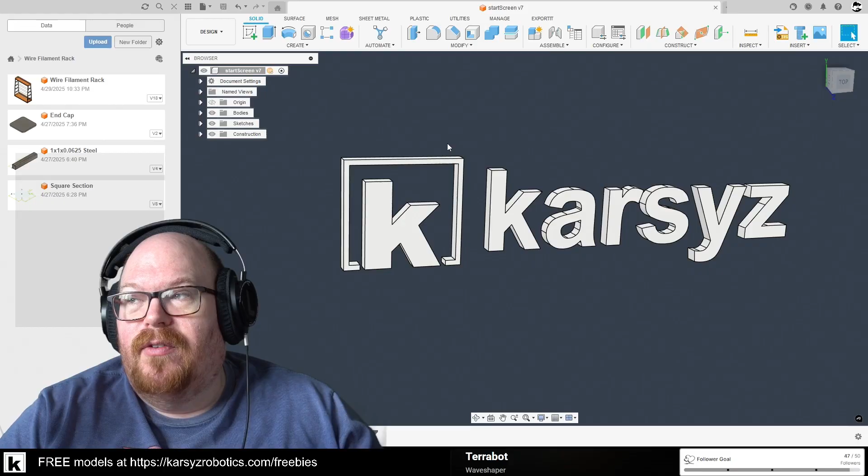I haven't really thought about that because I did a lot of contributions in, excuse me, starting to leak. I must be getting sick or something because this has been happening pretty frequently. It's just like the one eye too.

Anyways, the Fusion 360 Discord - before, when I used Facebook, I was on the Facebook group. Howard Swami, if you're out there, thank you for everything that you've done. I remember trying to compete with you on how many things you were helping out with for the community. It was so good at the time, and I was learning a lot from you.

Hopefully you learned a little bit from me too, maybe not, I don't know. But it's like trying to get to that level, that was the aspiration. I don't really have - I could give my time in other areas, but I feel like I'm pretty good at doing this. I'm not great, maybe I am pretty good at this. I've always been super humble, but I'll just say, okay, I'm pretty decent at doing this, plain and simple. So I'm willing to try and fail and learn. That's one of the things I want to keep doing.

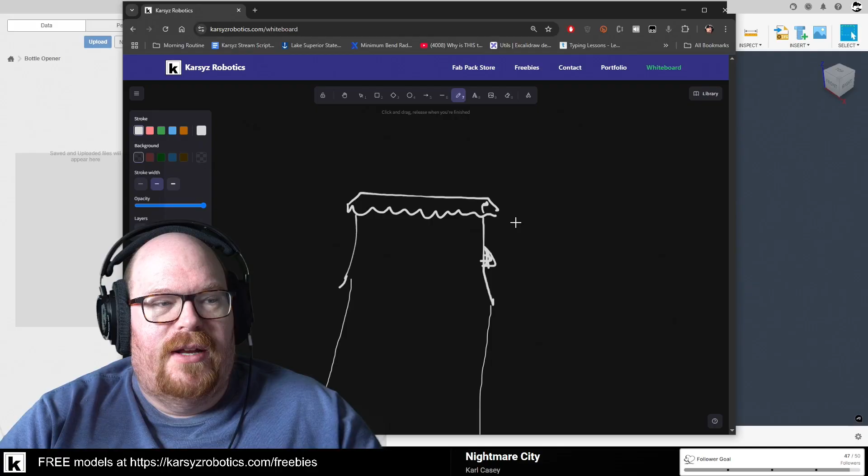So bottle openers, hopefully we've all used one at some point. The whole idea is that if you pry against something, like a reaction force, we want to get this thing to go like that, and we're prying up on this. So this force has to be coming down here. Two forces like that, it's literally that simple.

Usually when you have a shape, you could say I've got like a hook thing here, and it's got a handle on it. Pretty basic, right? So now we want to make this thing stationary, and a lot of the ways we do that is just by having a piece.

It's got a hole in it. I'm going to draw it in front view first. Maybe a couple holes here, and then you stick the bottle up underneath this part here. So it would be something like that underneath. Then you see it here, and underneath, and then you literally just pry down on the bottle, and it takes the lid off.

So some of the things that happen after this comes off and you move the bottle away, the cap falls straight down, and then maybe you can hold the cap into something. People have made a Plinko game with it, like if this gets to 10 or something, they've made electronic versions in a whole bunch of different ways, like little arms that get counted. There's just a whole bunch of different stuff.

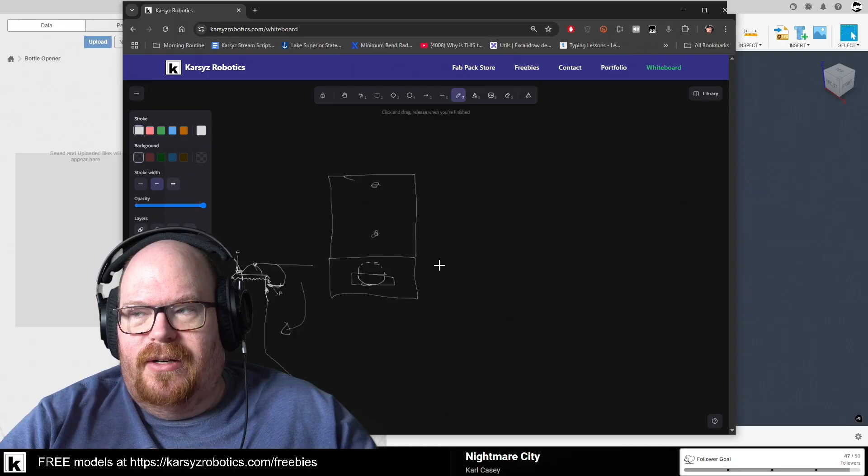Yeah, or something else, right? So there's no real rocket science in this sort of product, at least not the way I'm designing it. You can open up a bottle with a lighter or your teeth or something. It's not necessary, but it's just something fun.

So if we look at it from the right side here, in third angle projection, so if this was sitting on the thing, we just go and look at it to the right. This is kind of the idea, right? It sits on the lip and then it goes up, or it could be even the other way. If you have the bottle tipping into here, so we're just going to draw the bottle, right, so we understand what we're doing.

This is the most horrible bottle ever, we should probably do it with a little bit more care. I love these sketches, so funny. We need to hold this side here, so it's got to be up, and then there's got to be some sort of little hook or whatever. So the idea was this is like something like that, or oh, I thought it was going to be like this, but you know, my brain.

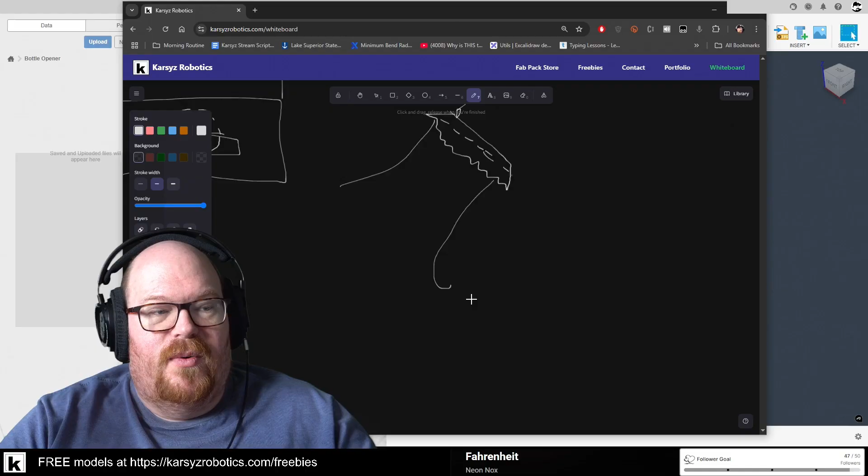So remember, we need to have the reaction force coming down this way, and this has to have a hook or something, or it just has to bind on here. So if this was straight in and out, it just has somewhere where you can put the bottle in, because you don't want to spill anything when you do that. So the liquids are usually pretty close to the top, so then this liquid would be horizontal or something like that, depending on how you're holding it.

And then it's like one fluid motion, so when you twist it, this comes down this way, maybe this is the side that's being held, right, and then the other side has to have the force acted in on it, or maybe even just a prying motion. I'm doing all this to illustrate design principles or something.

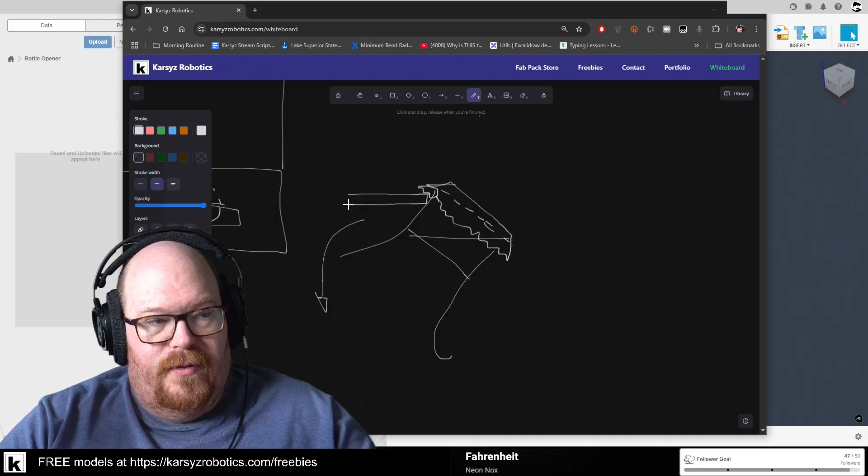Not as good, I really don't want to do that here. There we go. Better, it's more like this though. I keep doing the same shape over and over again. Pretty funny, here I'll get some training. So when we start here and go around... no, that's not the right tool.

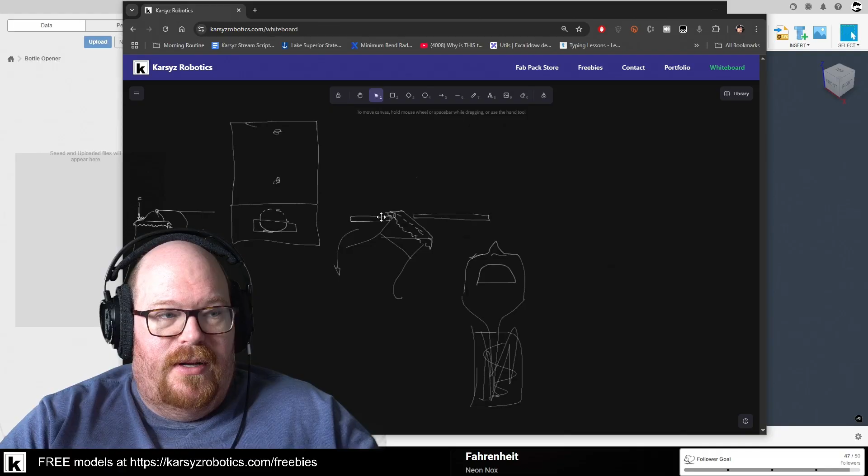So, yeah, having it like this, or you could have it just like... you sit it in such a way that it's just like a pry stop, right? Up and down, this is probably a little bit nicer, but you want to have some sort of area that you can, maybe on an angle, something like this.

Right. You could stick it in sideways, or having something that's flat is probably just as good, but if it was sticking straight up and down, think of what that angle looks like. It's probably not as exaggerated as that, depending on how big this opening is, and we could play around with that.

If you wanted to put that at an angle, where's my pencil? Right, and then this was like stuck in something else, or even just screwed into the wall like that. Right, and you have your spot - you just go up with a bottle and put it underneath this, and then you have something to pry against. And then there's twist-off ones, obviously, that are available as well.

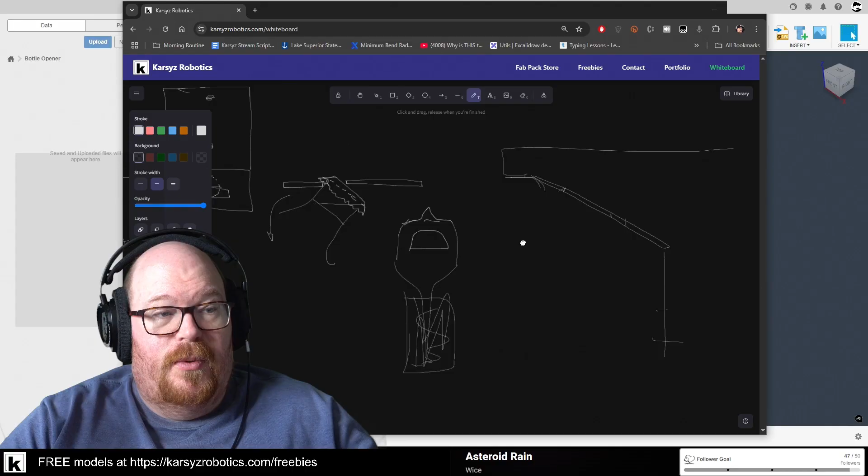Those are really neat too, by the way. So yeah, it's like this, but I just drew it upside down for whatever reason. I guess you could do it that way. If I wanted to do it this way, it would have to be...

It's so funny, right, that we can really talk about a bottle opener with such... okay, so like that, maybe not that big. I'm gonna move this up here too. So if this was the idea, right?

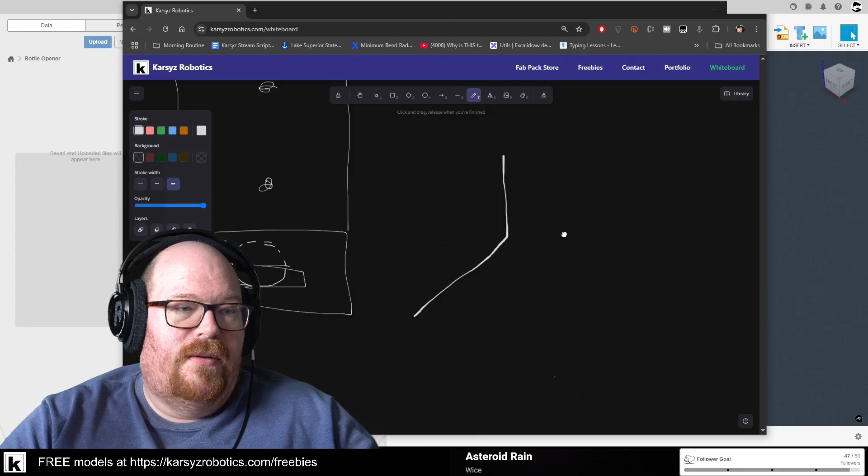A piece of whatever that is, there has to be - this is what you would pry against. So the difference between, you have to have a large enough space in here to get the bottle pry system to be, you know, from here to here, like that idea. So the bottle has to be like that. Well, there has to be room too.

And then now you have a binding condition. So as long as you can get the thing in there, this is probably great. So let's try something like that. Actually, we need to do a little bit of research - how big? What is the size, standard?

What is the size of a standard bottle cap? Bottle cap: 26 to 28 millimeters, 1 inch, height of about 5 to 6 millimeters. Most common size, 26 millimeter crown, widely used for glass bottles. So 26 millimeters. Plastic screws for PET often 26, 28 being the standard.

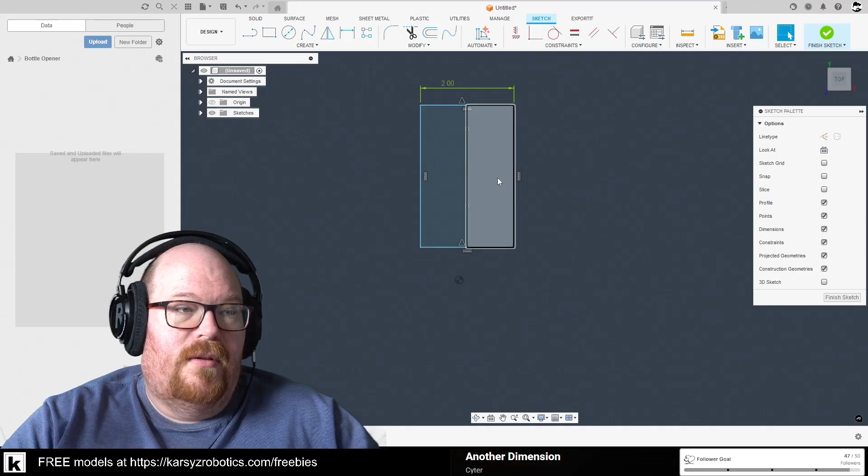Oh, 0.75, something like that. Trying to think of how thick that was. It's probably a 1/16. I've been using 0.75 for a while, so maybe I'll just keep using that.

Stainless is extremely strong, way stronger. Like the edge of a lighter is fine, so this is even better. So if it's a couple inches wide, it'll give us some strength on the one side, and be fairly robust.

Right, so we have the one, we're gonna convert this to sheet metal. Stainless steel, look at that. You're gonna make the physical material. Metal, or stainless steel, we'll make it like 304. Why not?

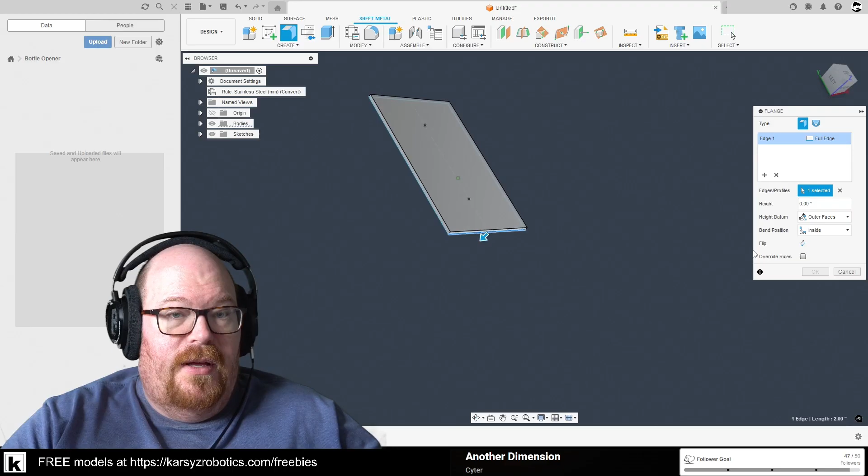So it's not going to be that. Maybe like a 45. If it's 2 inch, it's not going to be 2 inches. Maybe like 1.5 and 45, something like that.

Right, we're going to have another, maybe another sandwich underneath this. Geez, it really doesn't even need to be that big. It's like literally just to... you can make it out of, oh man, there's so many different ways you could do that.

You have to be able to put the bottle in here and then have it sink straight down. So if you wanted to capture it, like this is just the first piece in the puzzle, I suppose.

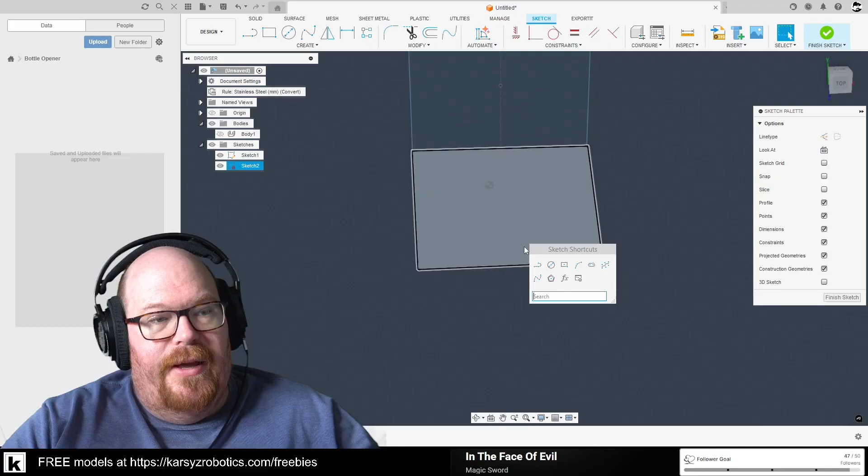So let's make a sketch on here. I'm just gonna turn off the body so we can see the outline of these. A couple sketches. We need the center of this. We need the outside as well.

Just gonna make a circle at some point. And we're gonna delete those. And it's gonna look something like a so. So it's not quite half. If this was diameter, so we know it's 26, so it should be a little bit larger than that.

26 millimeters is like an inch and an eighth or something. Yeah, 1.125. So it should fit in there, and it's not all the way around, so even though this could go all the way through, I suppose.

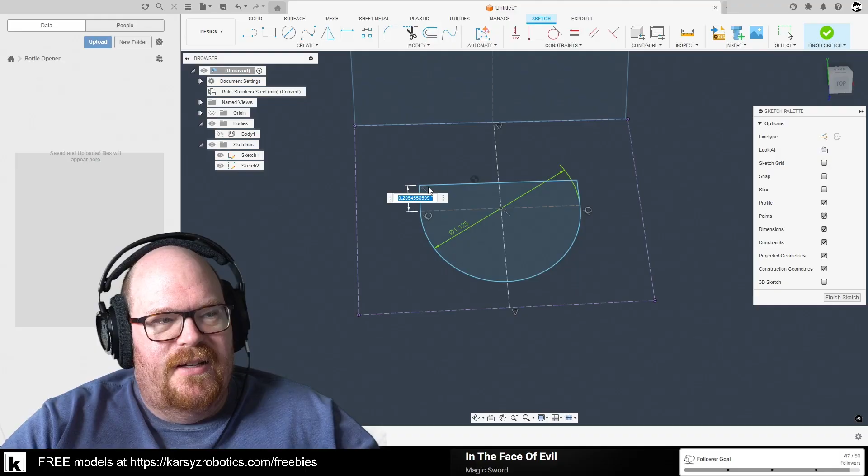0.2, it's not even really going to use this level of it. 0.25, I guess. And let's do, I like using intersection points even though we don't have to. 0.25, something like that.

Object, and like a pretty straightforward piece, right? So it's enough to stick the bottle in there, catch the edge, and then twist it off. If it was like this, so bottle gets stuck in from the side.

So this is what I'm thinking. You want to hold the bottle at about 45 degrees. What did I do here? Sketch on this plane. So if I'm holding the bottle like that, like this, I need to have it's in the wrong direction essentially.

So the pry needs to be either flat and to come around like what I have here, right? So this is underneath this area, but ideally you would want it to be like crossing it like this, right? So this should be all the way up the other way.

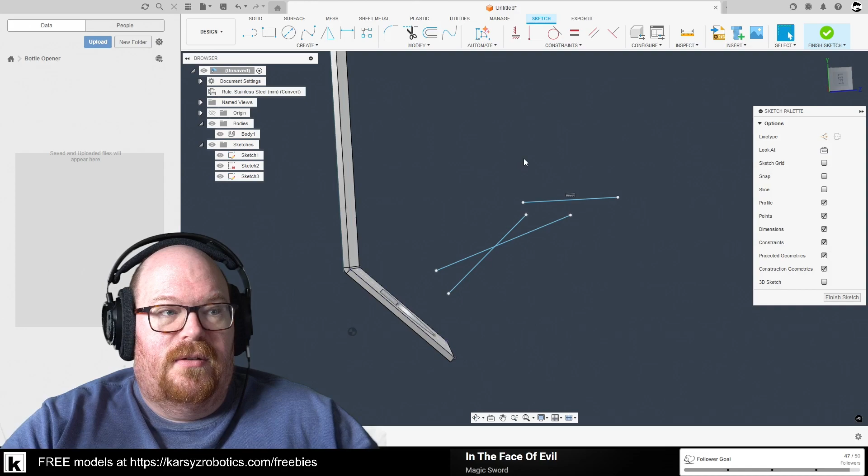So if we did, it's actually quite a bit more, right? It would be something like that. Would make more sense. And then you can screw right in through there and that.

Deleted. Right? Or is there a simpler way? So you kind of see what I'm looking at here. This is just not drawn right.

Say I think about it upside down. It's like I want it to look like this because that's what I think. Like if I'm standing here looking at, this looks maybe more pleasing. Now it should look like this. Silly goose. Right? So instead of doing this here, I'm going to do it up here.

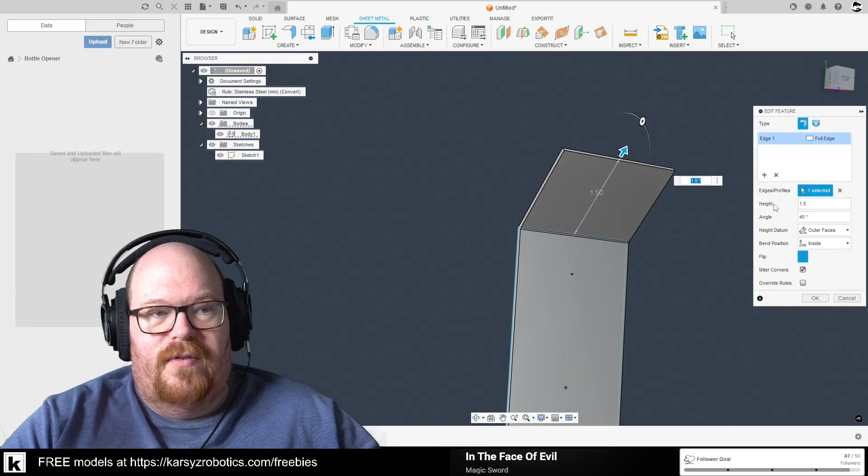And not that one, that one. 1.5, is that what we did it on? Not finish sketch. Redefine sketch plane. And go into the sketch again.

And it's good to show you guys all this stuff here so that, you know, if you make these mistakes, it's all good, man, don't worry about it. This is my way of moving it around. Ooh, there we go. Just need to get it close.

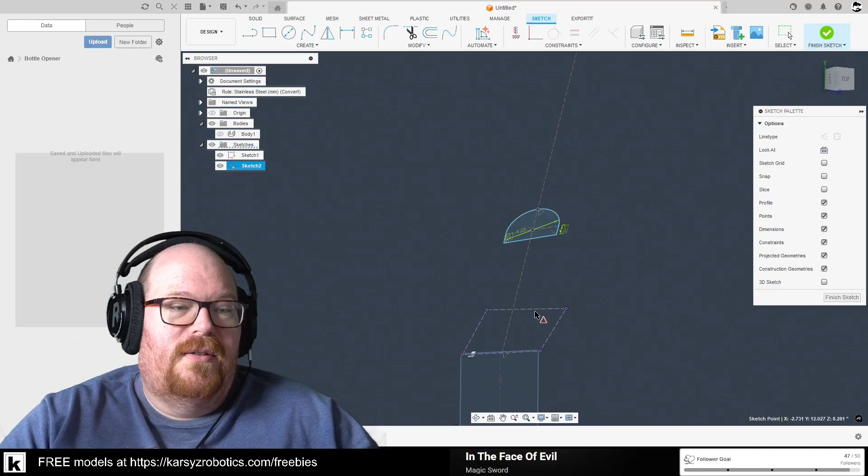Project these. It's probably gonna break everything. Midpoint. Midpoint. And where did it go? So everything is kind of in the right location.

0.25. Right. Did have it selected, right? Profiles, there we go. We can add some of these.

0.125. There we go, it looks nice. So it's not full bottle cap size, so you're guaranteed to have leverage there. There's the 2, maybe it needs to be a little bit more, but this is slightly more.

So we're going to actually make this another, so it's 45, 50, 60 degrees instead, right? Because we're going to figure now it's the bottle's going to be at roughly 45 because of the 2 pressures here between 1 and here, between this top edge, the top edge of this, and the bottom edge.

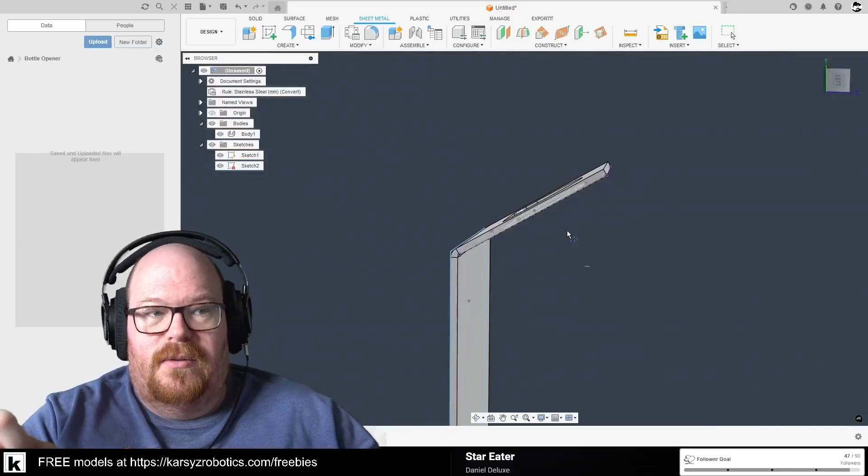And if we modeled out the bottle or the bottle cap in its full size, like full scale, because we do everything in full scale in CAD, then that's pretty straightforward to look at. So now we have like, I know it's unsafe to mount things next to a light switch, but having this as a light switch cover would just be funny to me.

So yeah, and then these could be, make them, there's one like a full thing. I want a little bit of a flat on here, 0.875, something like that. Totally easy and acceptable.

It would be funny to have like this as a light switch. A bottle cap opener light switch. See how things evolve really really easily.

You don't really want to put liquids that you're holding next to a light switch, but we've all turned on the lights with a mug of coffee in our hand or something like that. So it's not exactly... I don't know, I wouldn't put it above anyways. Below would be a better idea. So if this was, like I drew it before, if this was down here and you just use those 2 screws, then you're prying on the electrical thing because that's what that's attached to. Probably a bad idea.

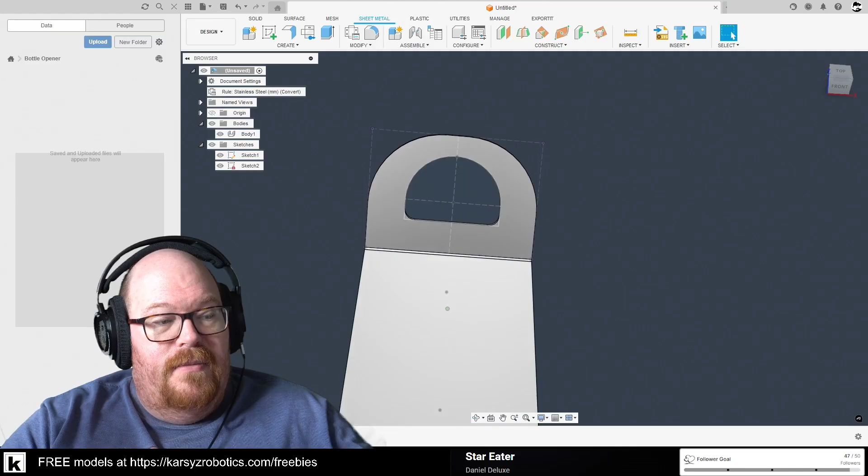So, what else? Let's just make it look a little more pleasant. 0.375. 3125. Just kind of looking for a congruent sort of shape. It doesn't have to be perfect, and it should look a little funky, but not super funky. Maybe we can do a small-

Show the dimensions. So 2, maybe 1.75. There we go, that looks better. Pretty straightforward so far, right?

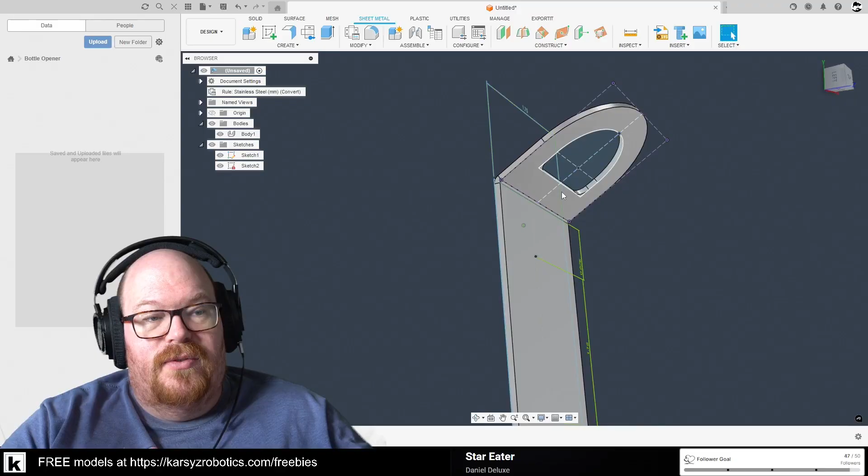And you just need prying leverage because this is good. This wants to be pried backwards. It would be beneficial to do like a dimple in the middle of this right here to make this really strong. So this I don't think is, yeah, that's big enough because you figure, what's this going to look like? It's going to go all the way to the edge here. It might actually bind on this first. Be really close, it'd be really close when you stick this in here.

So we can always make that 1.65. Jeez. 1.625. There we go, slightly larger. Yep.

And we could create a dimple from here. What that looks like is, when these things are created or bent down, usually you would want to have like it's a bridge almost. And it looks like this, but in the other direction.

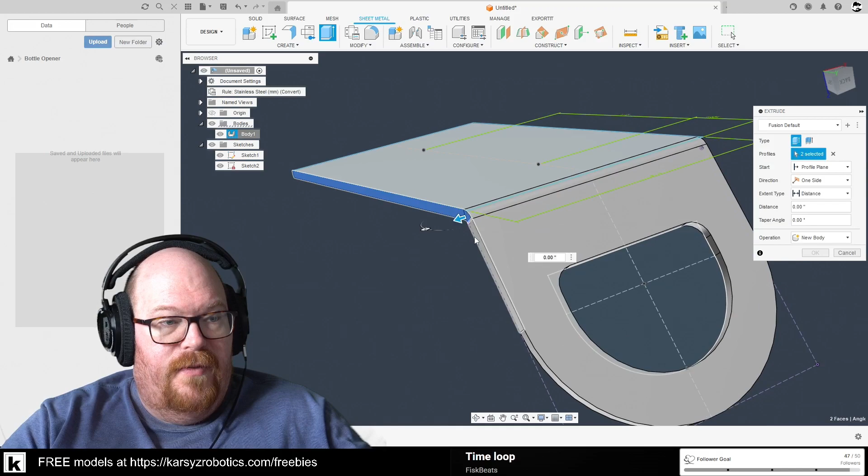So if I had to, say, copy this - oops, let's copy the body. Oh, you can't actually copy it. Okay, well, I'm just gonna make another copy of this, like so. New body, that's all I really need. Let's do like 1, so it's even.

On this, I'm just gonna do this really quick so I can have like a repositioning sort of idea. I need to create a sketch on this. So the easiest way to do that, because I want to position it flat. Where is the plane on? Am I blind? Oh, tangent plane, there we go.

So, wow, holy moly. So on here, just gonna project this face. Give myself a center point to work with. That's it. I should be able to align this. If not, I'll make it into a component. I thought I could - never mind. Yeah.

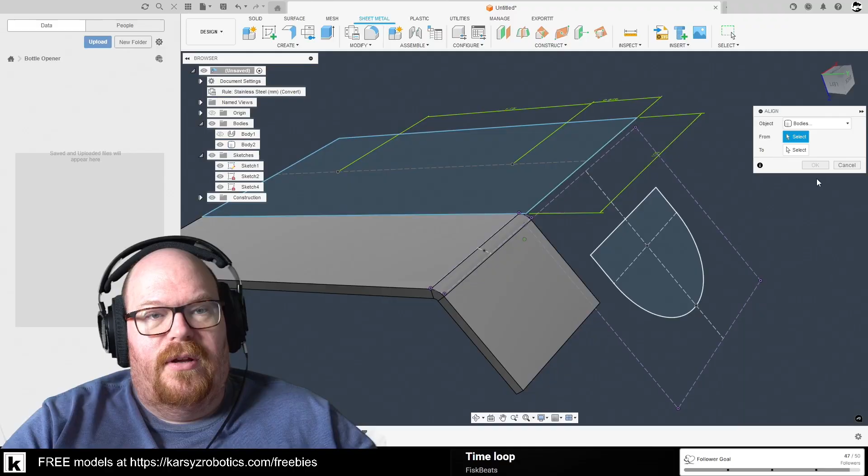So here, here, and here. New component 1. So 1 distance. Plane, tangent plane. Yeah, and just redoing all this really quickly here. Notice I'm just doing stuff a little bit different each time for funsies here. So now I have a component that I can move around. And wow, it's not even saved.

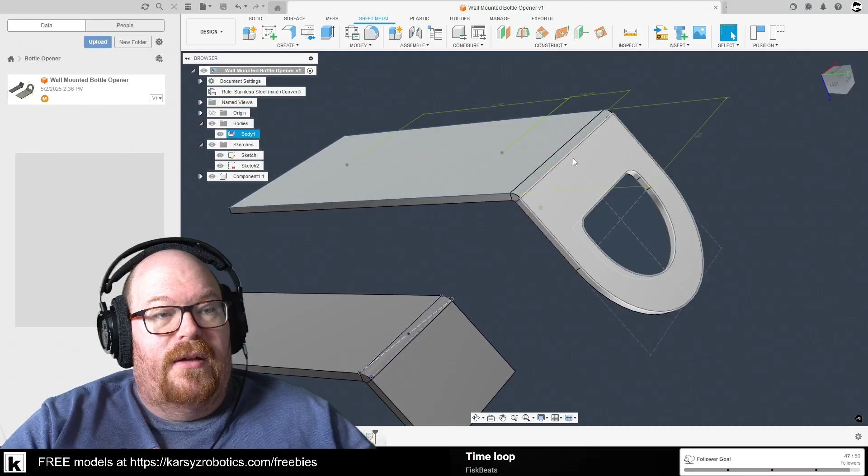Wall mounted bottle opener. We can do something fun with this too if you'd like. So similar size, and then this, we're gonna do something a little different because I want this to be - I want to use this as a flat, right? But then I want to put it here, but I want a rotation. So I want to be able to rotate it and rotate it easy.

I have those rotations regardless because it's a component. I can put that into space, but let's do - can I do a mid plane with these two? Revert position these two here. Yep, it'll give me an up and downsies. And then I'm going to make another sketch, which is basically like perfect. And an intersection-

Of this. And I should be able to get a perfect thing from that. Right on. Right, so there's that perfect point. And I should be able to, so this is flat, right? And then I should be able to go like so.

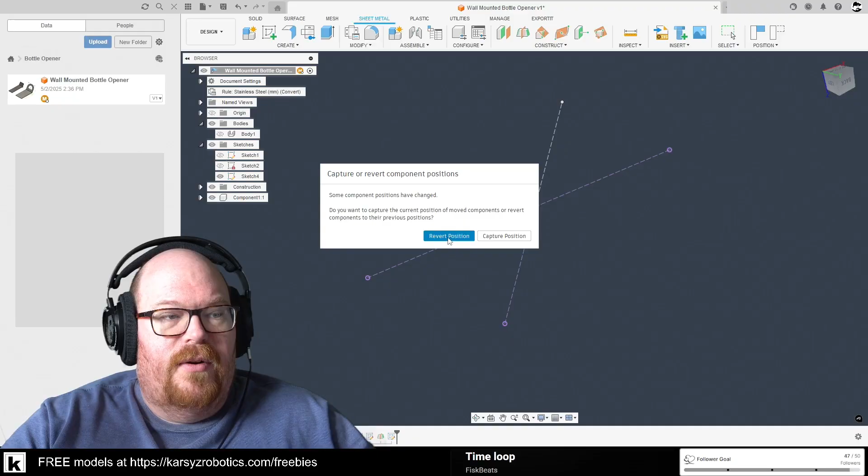Nope. Oh no, I'm sorry. Yeah, I didn't do that right. I was thinking something else. It was like, how far down do I need to go? And-

Yeah, let me double check that. It should allow me to do this. I don't know why it's not giving me that point. So if I was to stay here, it always snaps to here. But when I go - friggin' eyesight's kind of shit with these glasses. See how it wants to snap into that other location? You do.

Wish there was like a cycle command. Let me see—when in Autodesk Fusion, when I'm trying to select a joint point, is there a way to cycle through orientations? UCS.

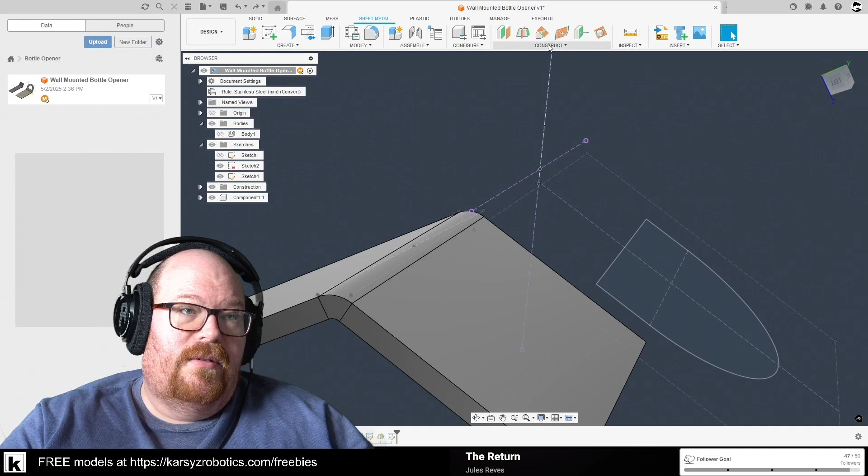Yeah, that's not going to be at the right angle. Let's... I need to go one more step. So let's do... oh, that's right, I can't actually pick that. Can I do it at an angle? Yep.

It's 30, so good. And then after you have that, if you just project a point in here, it takes the orientation of the plane, essentially. Right, so this—I can go to here, and now that is correct, but I can go 90 degrees to that, and now I can go in. Essentially that's what this is from the outside. So if I did a 0.1875 dimple, or even a 0.25 dimple into this, it's going to create that shape.

Oh yeah, I need to have this as 45 as well. Yeah, I did it wrong on the other one too. So it gives me the one side, but that's... well, I could do 60 and 60. That'd be quite a dimple.

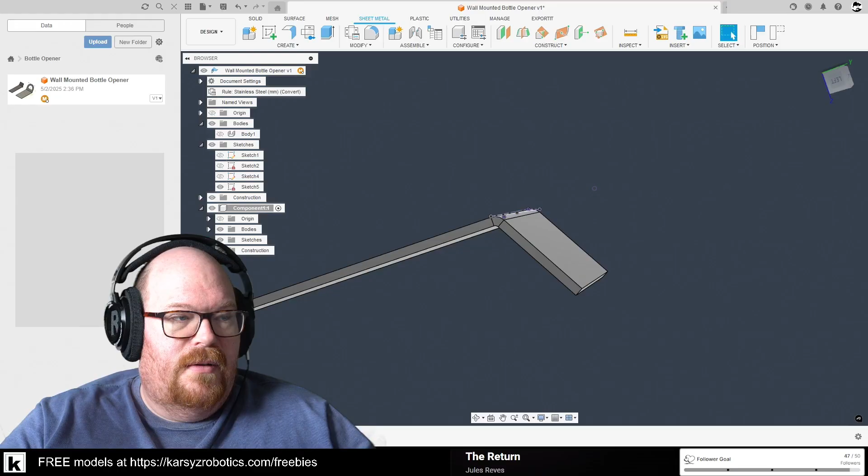Okay, let me interrogate my other component here. Construction plane is like this, but it's not to the other one. See, so it's easy to screw these things up if you don't do your due diligence here. So similar idea, I want this perfectly.

If I want this in the center and I need it on a flat plane between these two, the mid plane is pretty much the best choice. But how do we do that? So I have... right, so that's at the right level, I think, but it's the wrong thing. So using what I have, so that gives me this.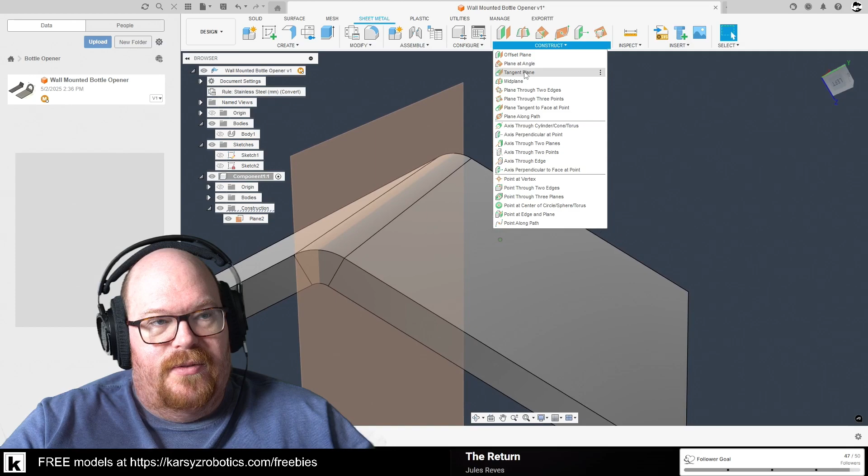And could I do a perpendicular plane at a tangent? I don't think it has that. So it's tangent plane—there's no modifier to say go here, but I suppose I could just do that. Is that easy enough? Yeah, easy enough. I like it.

So project again—we're just gonna find the center point of this, and that's actually in the right spot. So we can do that to the other one too.

Right, so when we did this one here, this at an angle, we can—if we just edit this—see that's not the right one. So if we go back, delete after history. So same thing.

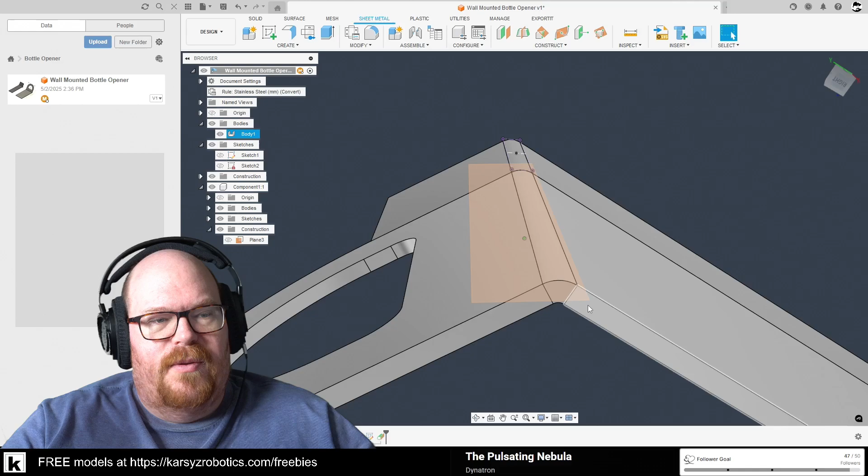Actually, this is a good idea. So I have—do I have an angle already, right? So because I would derive this angle from something if I wanted to, so that would have been a sketch beforehand. That's right, so I have an original sketch. We're gonna go like this, we're gonna project that point.

We're gonna say, okay, this is gonna be—what am I, is that offset? Oh no, I forgot to lock that down. I'll lock that down. Right.

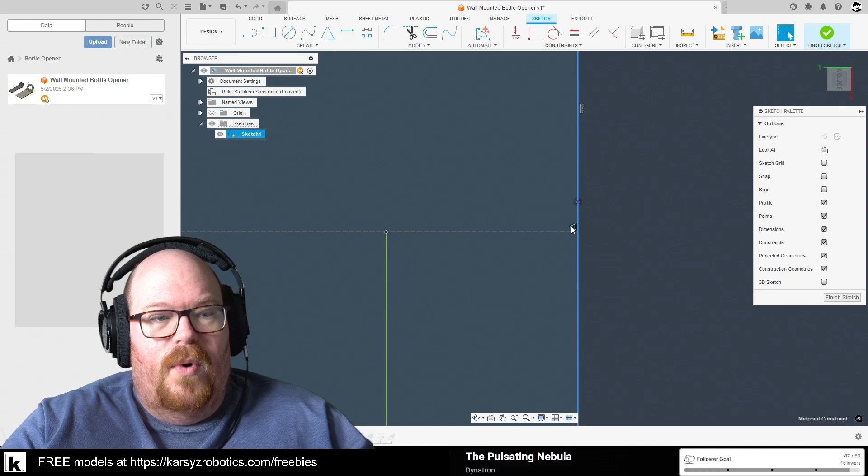Oh my goodness, what did I do with this thing? I really butchered it when I removed everything here. What? Is there something else in here? Ah, there's two—did I copy this by accident? No, okay. Debugging, alright, so these two are—there we go.

This is here to here. I don't like that—hold this in here. That's locked down, and I guess we could do like that. So it's just this edge here is not locked in. So we could do 3.

No, 0.625. There we go. Wow, holy moly. So if we're looking at this here, we can say, okay, what's that? What do we want this at?

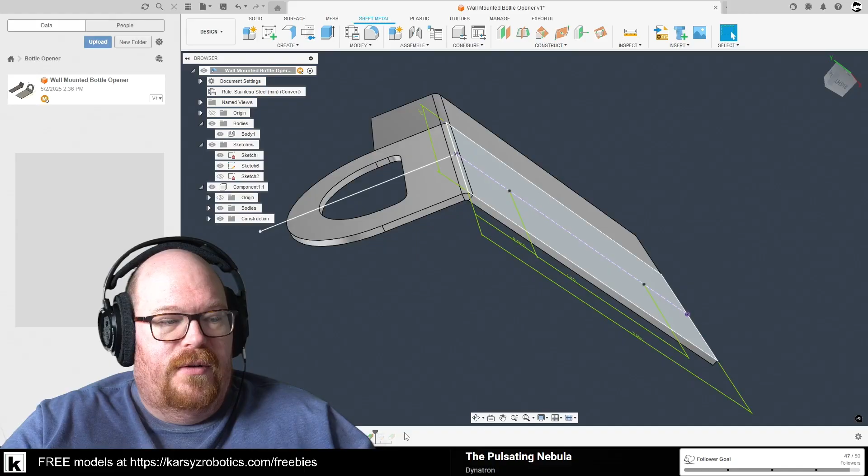30 or 60? We said 60, right? And that's with this angle here, but we can draw in exactly what we need already. So we'll just go forward. See how that's sitting out? We need to have something that's across there.

So, across. And we could say these two things here, right? These two angles need to be equal with each other. And there's a couple of ways we can do that.

We can just do that. And then this one could be equal to the next one. Or we could say whatever this is here, this is half, so this is divided by 2. And then if we check this one, that's automatically like that. Or we can draw a line that's 90 degrees, so perpendicular, and we could use symmetry.

Or we might be able to use symmetry between the two. So if I have an angle that changes, this is always going to change. That's the idea. Sometimes it's easier to do with just sketching it out, sometimes it's not even possible. So with these two things here, it doesn't want to solve it for whatever reason.

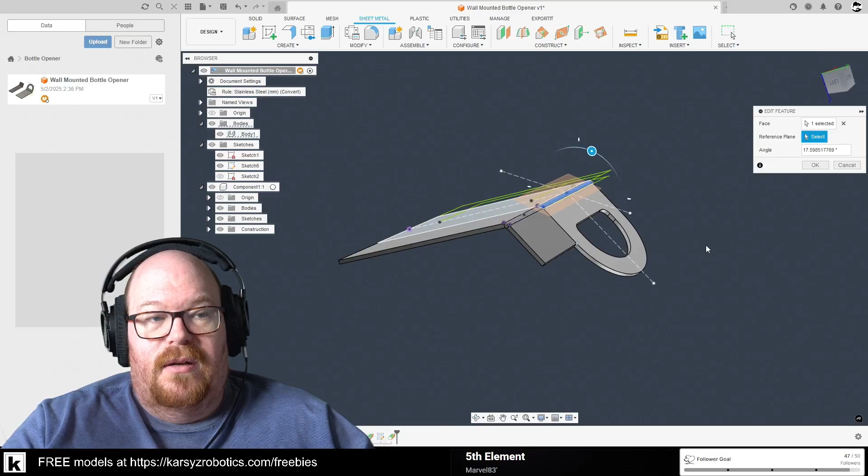But what we can do, we're not going to use that anymore because we have a perfect spot here. So this is the theoretical point. I would say we would technically use this. I'm just going to go out on a limb and say that. I've never done this in practice, so you could take that with a grain of salt.

It seems easier to me to use the design point, so we'll use that. So let's delete this. Yeah, delete that. And we can make another plane based on the angle of this, which should easily be controllable. So, plane at an angle. And if we did 90 degrees to that plane, then we should get something that's at that angle.

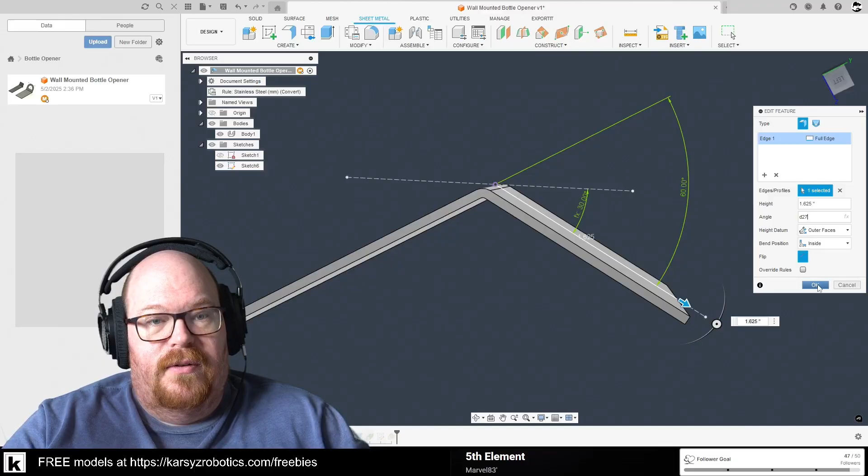So if we change any of the other angles, like the angle of the design, also when we do this bend, we should also use - let's see here, show the dimension. We should use this angle because that's the one we're using. So D27, D27, right? So if we change this angle, 45, everything changes with each other.

See how that looks? So 90 makes it a 45. So we always have that tangent plane that we're looking at the design point. So, at the design point.

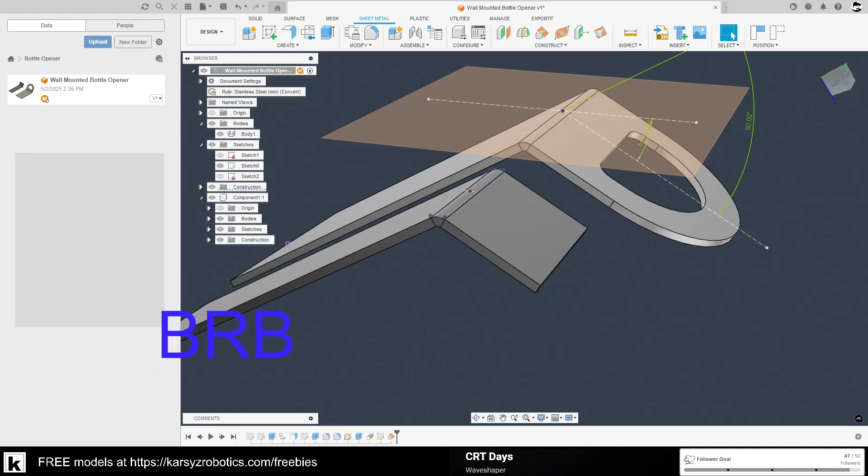Get some sound back on here. Okay, so what was I doing? Making everything parametric, right? Okay, so similar with this one.

Could do the two. Let's see here. So those two, that's in here. So we can just back up to go to these three, and we want to create whatever this ends up being. We want to create the same aspect of what we're trying to accomplish here.

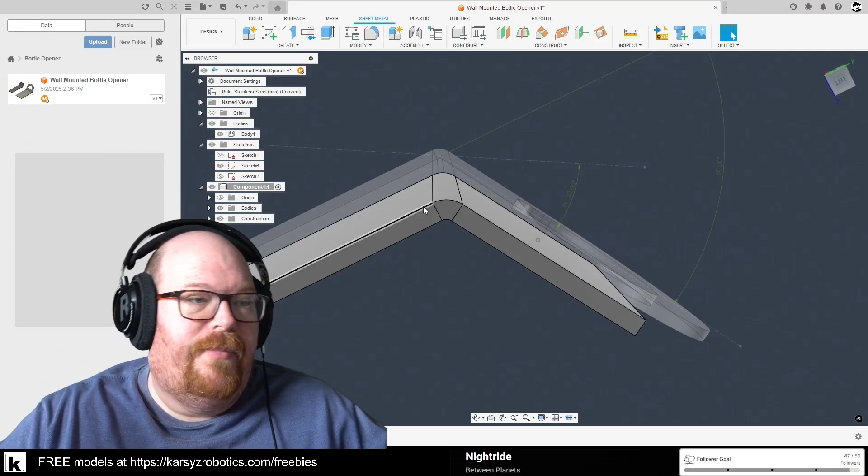I think because we have the way that this is created, I'm just going to create this piece here on plane with these two things. So I have these two items, but I don't have the other two. But I should be able to create this dot, this point, at the center point, which is correct, but it would be in the wrong plane.

And then, yeah, let's do it the long way. So we're gonna sketch this out, and this goes all the way to here like so, and then we do a sketch on this point, and we do those two, and we should have an overlap when this is done, right?

And then if we were to do a midplane between - where are we here? Or even a three-pointer. Let's do a three-pointer, because we're psychopaths, right? Here. There's a second plane - we could have just done a midplane. And then we're going to project these two points, and then we're going to draw something right in the middle.

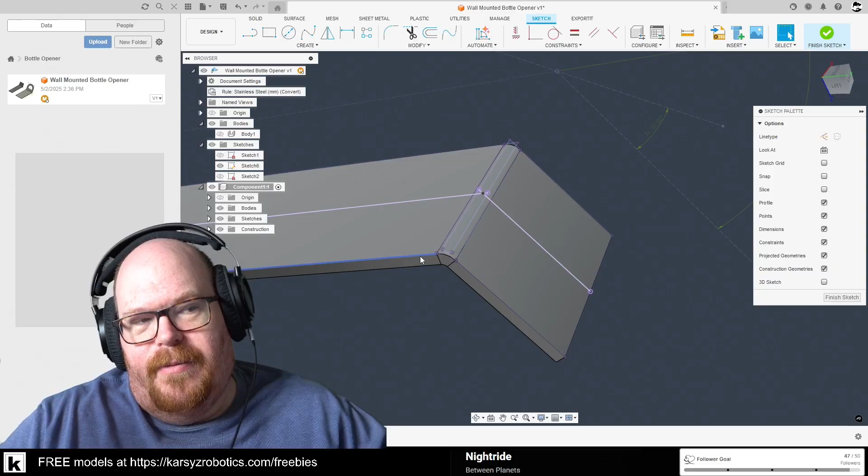Is there an easier way to make something like this with the tools that we have in Fusion? Yeah, there's probably a few different ways. We could have just made a mid plane and then projected this point, because that actually exists, right? Instead of going through all the effort to find this. But if we're doing it just based on what we have here, that's like a theoretically easy way to think about that.

Can I do all these? No, I can't. I have to go into individuals. That. And the one before that.

Okay, so we have this, and now we need to create a symmetry between these two things. Hopefully we can do that. Right, so between these two and this one as well. And we want it done at, so this is that theoretical point.

This is moving off in space. Hopefully the symmetry works, damn well should. Right, and then we have this is an endpoint for this. Should be an endpoint. Look like there's another thing there. Oh, it's sitting above the material. That's why it's gone. And then we can make a plane on this.

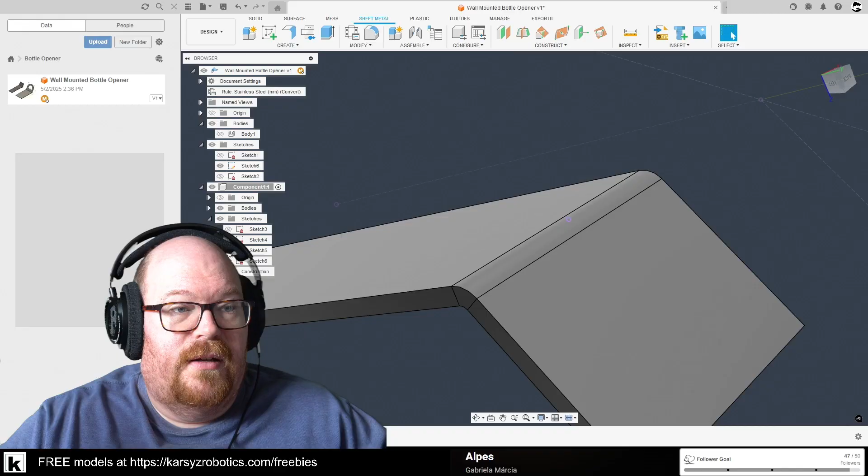Oh, that's this one here. And it's going to be at the very beginning, and this will be plane right there. So now we actually have something to pick, right? So joint to joint. Yeah, so many joints, bro.

Yeah, compared to the other one, right? So when we were doing delete, so no matter how this changes, this point is always going to be in the correct spot. So go back to here, and we have another few ideas.

Edit feature. Yep. Did I make a sketch on here? Is this one here? Yeah, I didn't do the actual sketch yet. So, and then we have, where's the position? So right there. Okay.

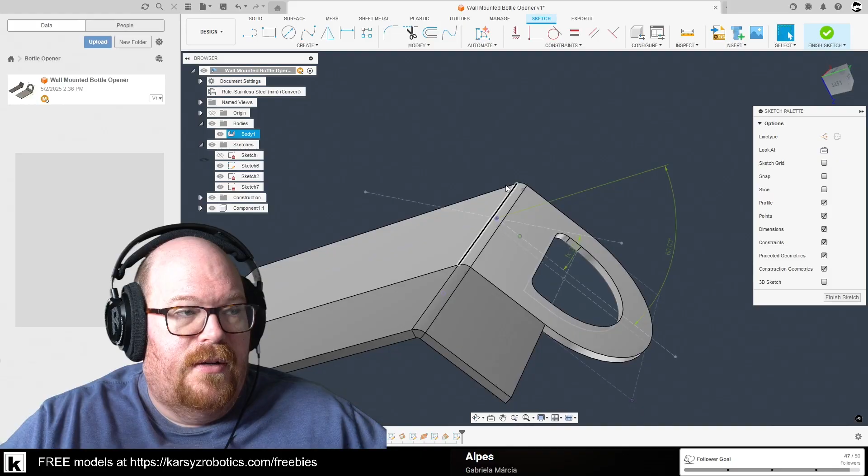And the idea is that now we have a design point to a design point, and they're both in their correct plane. Flip. 90. And now we can go down.

This is design point. Say 0.25. No, negative. Derp. And that's equal to whatever we had here. So we could make this, if we wanted to make this 45, we would just have to design it that way. Let's go minus 0.1875. Can make it a little smaller.

And now we have the geometry. So where we could cut out what's left over of all this. You cut the one from the other. And then we would have to blend these in at this radius. So 0.092 for the calculation. And then this one here, these would also have to be blended over correctly. Right, so making that dimple.

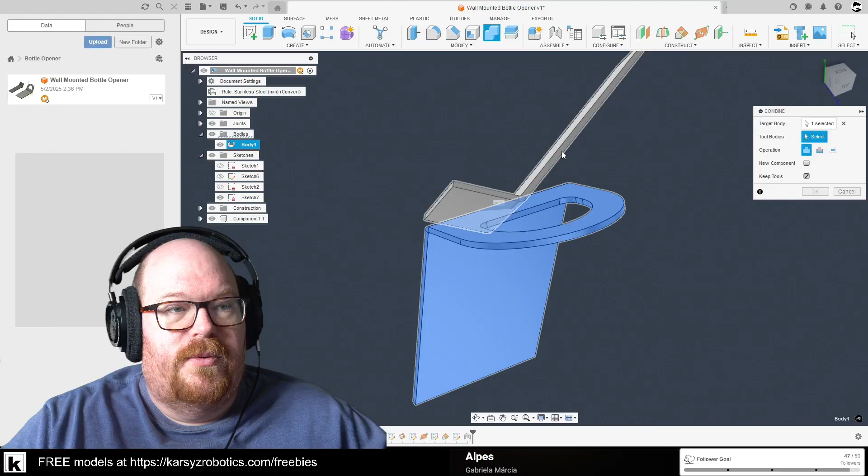Solids. Let's do, we're going to keep all the tools. So we're going to cut that. Cut. And then we're going to do the same. Oops. So in that component, see, we cut this out.

Oh, that's not good. Come on. I don't like it when it does this. Delete, it takes from the wrong thing. Save. Did an awful lot of sketching there.

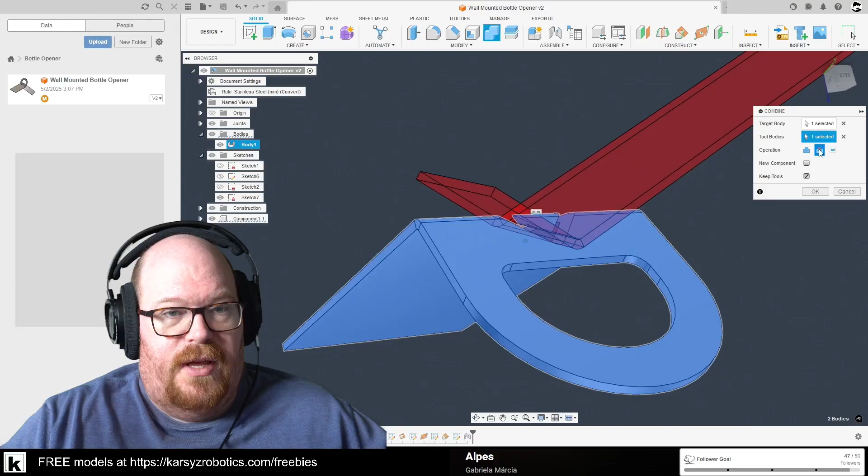Sketching, so what is the difference between these two things here? Isn't that interesting?

Right, so using that as a cutting angle or cuts, and then we got to do it the other way around to get the other piece, because this piece needs to stay in there. This little piece gets removed, and the little piece on the other side of this one gets removed. Right.

Keep tools. Keep tools, right? So I should be left with a little piece in each one. Is that correct?

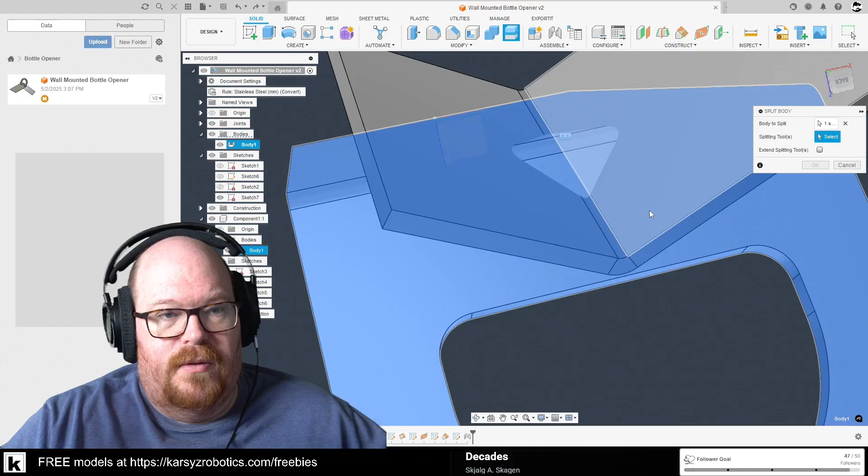Or even better yet, why don't we do, we're going to cut this body with this. Okay. So new body, and then this one here will be new body. So cut this one with split body. Right, so we have this one gone.

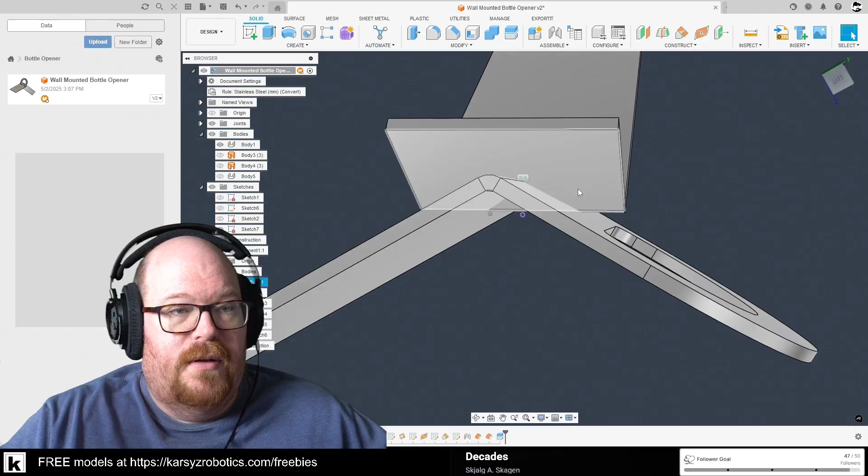Or that's what needs to be added to or removed from the one shape. And then this needs to be gathered into the next one. Right, so we'll take that out. Then on this side, this piece, okay, right.

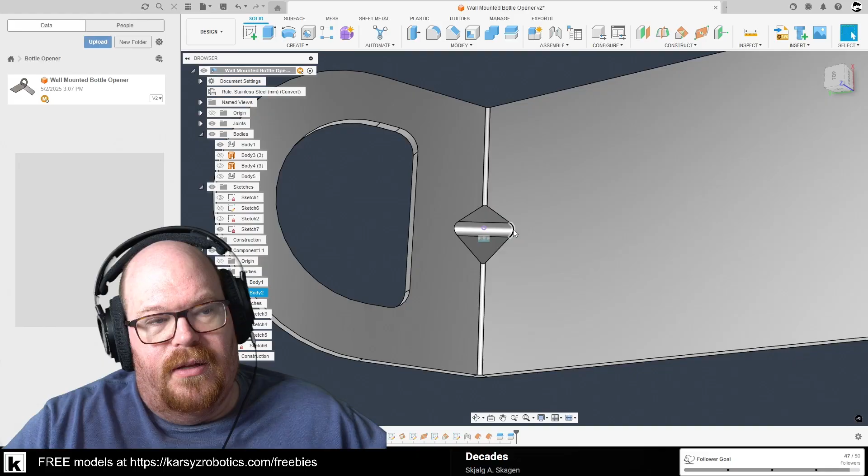So the whole idea is that this needs to have a thickness to it. I guess we could, what would have been a better way to handle that? I've only ever made these in Inventor, so, and it's automatic in Inventor. We could, this is like a rib, but then it's, if we made if we know how far we wanted it to be, we could say a rib that's this far and this far goes in, or it's like literally the same across like that.

So this is the thickness, and that's what I want to see on this side here. This is what I'm going to see on this side here, so this is the new face on this side. So this whole thing needs to be cut out, but it's this thickness here.

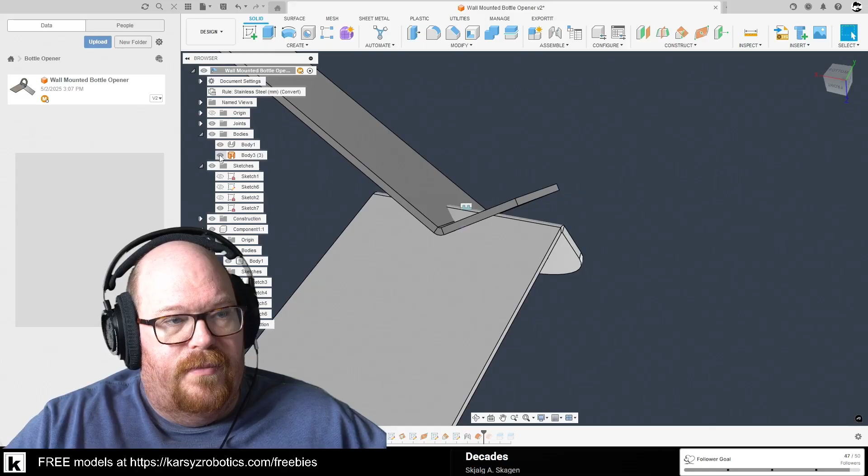So yeah, that was correct, I believe. So that's correct for depth. And then this one here, maybe this was wrong. On the inside, this is all that I want to be left with. So that's correct here. And this, yeah, that's correct. That has a thickness.

And go from there. So this gets pushed into there and made from that. Let's do a section analysis. Oh, we could just do right on the middle line here.

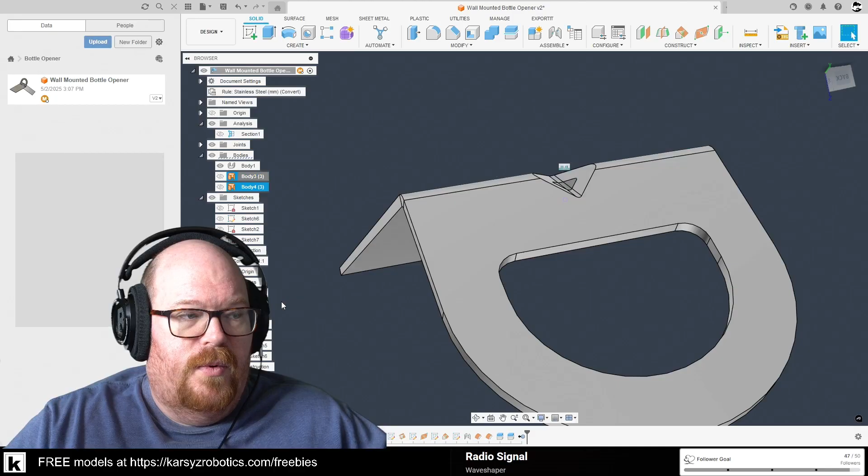So if we do, we add these two together. We could keep the tools, I guess. No, let's not do that. So remove. This is going to get added into here.

So this is 0.092. We're going to save this because weird stuff happens. 0.092. And this one is 0.03, which I don't think is right. 0.03 seems a little bit off. The inside area should be at least this, because this is stainless. This should maybe be 1.5. It should be at least 0.075.

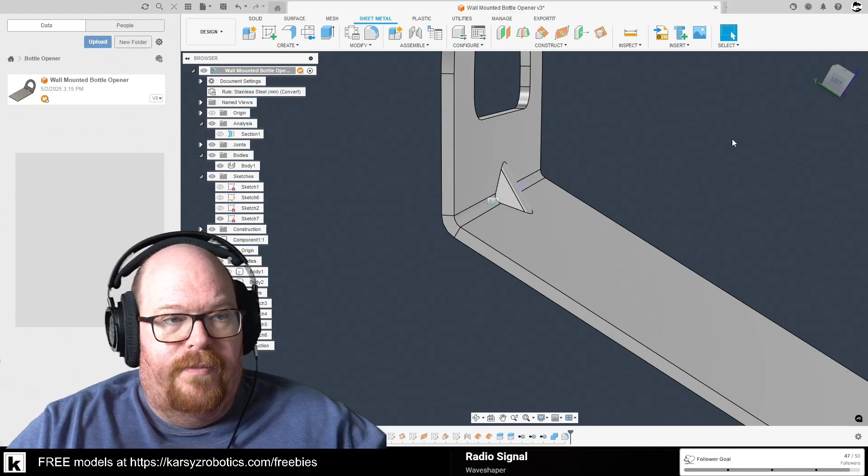Let's do thickness. .125. Seems more appropriate, I think. What did I do in here? Yeah, 0.065. There we go.

So, dimples. This would make this extremely strong. And we could move this based on if it's 0.25. That should be good. That would be redonkulously strong.

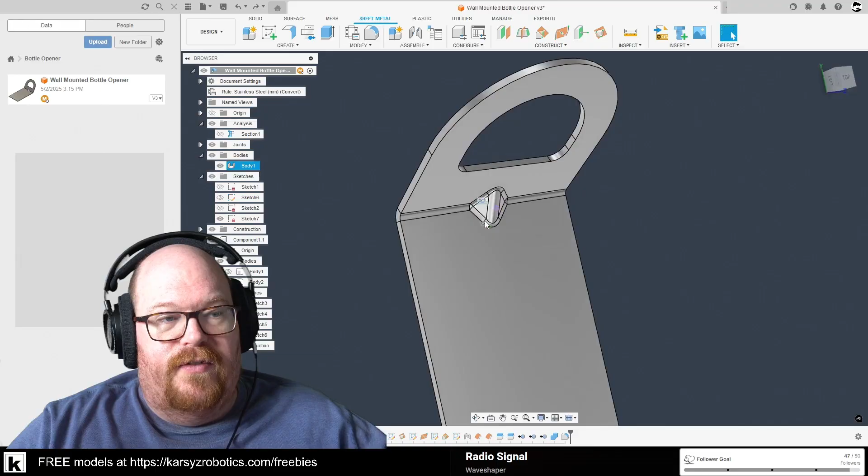Or we could have two, I guess. We just copy this whole thing over. Or we could do three and, oh yeah, move it over. Do a, yeah, it looks great. Do like a rounded corner. 2.5. And do I have like a thing at the beginning? I do.

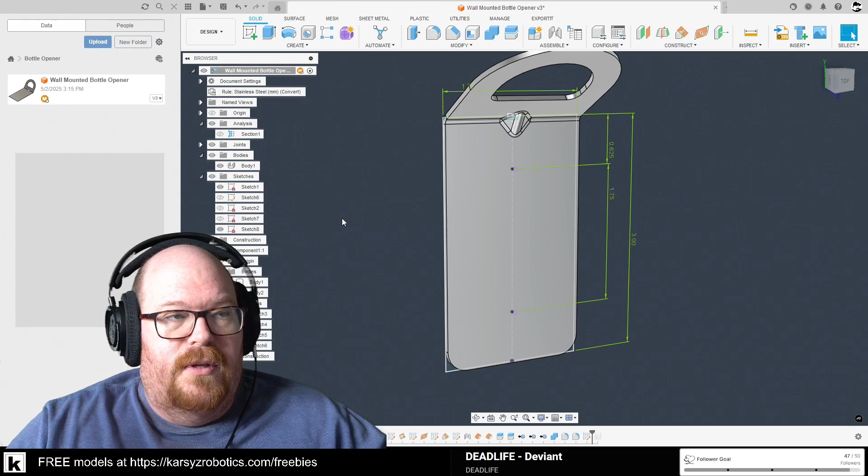So that was like an eighth inch screw, or machine screw or whatever. If we wanted to do countersinks, we would have to go the other direction. And then we would have to figure out how I want that to look. So if we want to do that, just have to make another sketch on the face that we want to use, and go from there. Choose that one, and then distance would be 2 here. We could do countersink.

And these are not the correct. See, these are machine screws. They're probably close. Number 10, right? So it ends up being something like that. So I think the number 8s for this are too small for an actual number 8 screw. And then this would be positioned based on... you have to remember, this is like really small, based on the position of something we had here.

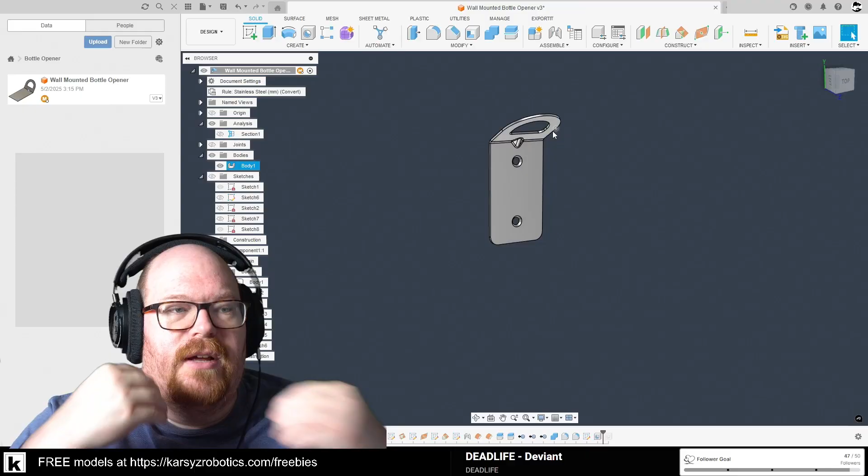So if you wanted to make something to catch like your bottle caps in, as soon as you do the thing, it's going to fall relatively straight down. You kind of have to try it, but if there's something on the bottom, like you wanted to build a catch, or something that's just down below that, you could just mount that to the wall, or you could have like a whole basket thing, I guess.

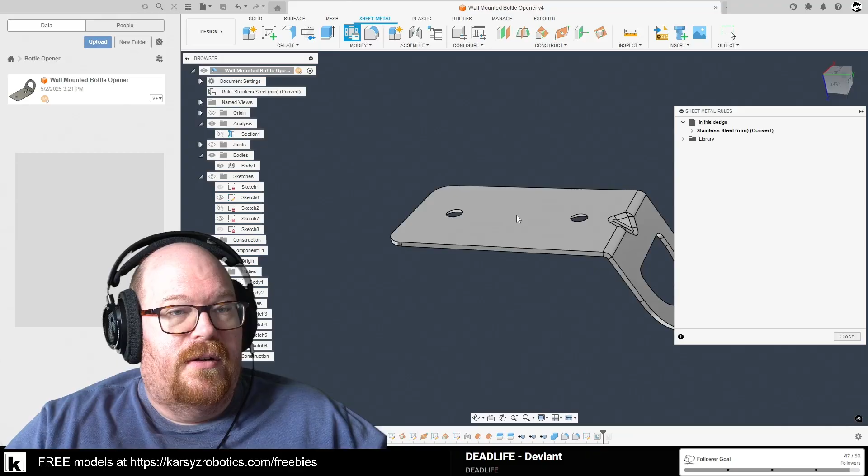This makes me want to build other stuff. So yeah, I'll show you how to form a dimple. And then this, I don't think is unfoldable anymore because of doing that. If it doesn't have uniform thickness, I would be very surprised if this unfolds. So let's actually try it, see if I can do a flat pattern. That's not what I'm trying to do here. Unfold all bends. Yeah, so it can't do this because it has the one bend in there.

But we could just delete. We should be able to suppress these features, which are like from here to, so all the cutting, and maybe not the last rounds. So these suppress features. So can we do these two before these ones?

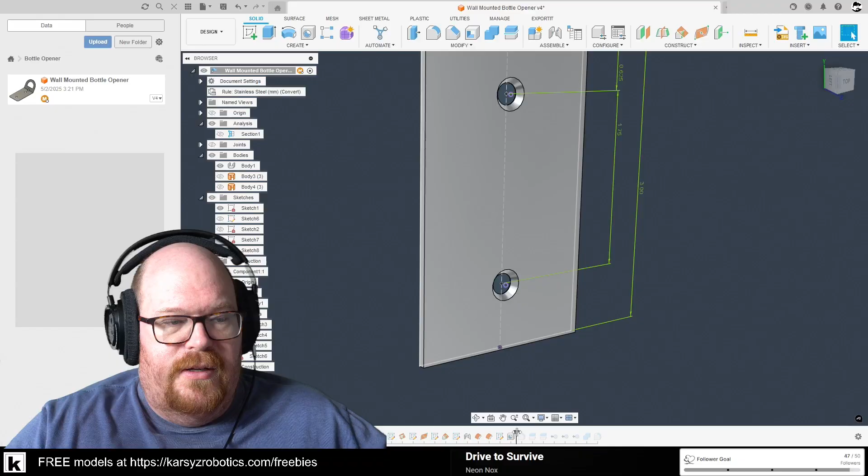Why can't I do that? Well, let's try it again here. Delete, we're gonna go back in time. I'd like to go back in time here too. It's strange that sometimes you can do certain things but not others, and it's not really for any good reason, because I don't think these things should be affected. They're based on points here. I know the surface changes slightly, but it's just strange. So if we want to stop that, let's suppress it.

Now we should be able to make a flat pattern. I'm gonna update this flat pattern here. Delete, I'm gonna create a new one. I want it on this surface here. Now, see, the flat pattern is different. We might actually want the flat pattern not with a countersink, like to show it that way.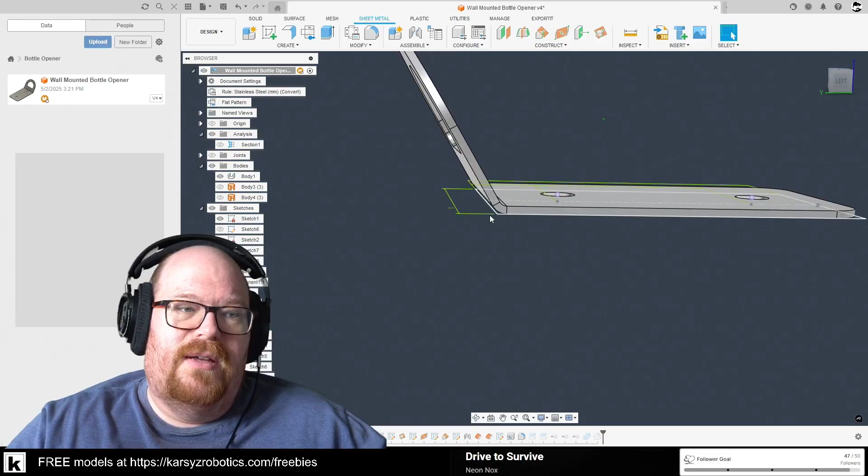But if you wanted to have pierce positions or a starter hole, something like that, you typically wouldn't do that. But if you wanted to punch a punch plate, then yeah, you would maybe not keep these in here, or change the hole and then do another hole on top of it afterwards. So you have a pilot hole, and for your pilot hole size, if you had a punch or were forming this—because you can form these, probably not in stainless per se. This is thin enough where you should be able to do some sort of coining, but stainless is really tough. So for the size of the feature, you'll probably be breaking your tools.

But they could be cut into shape. That would be an interesting thing to see. So let's do that. Yeah. So, woohoo! There's a few things I showed you in the process of making all that, and we could do more.

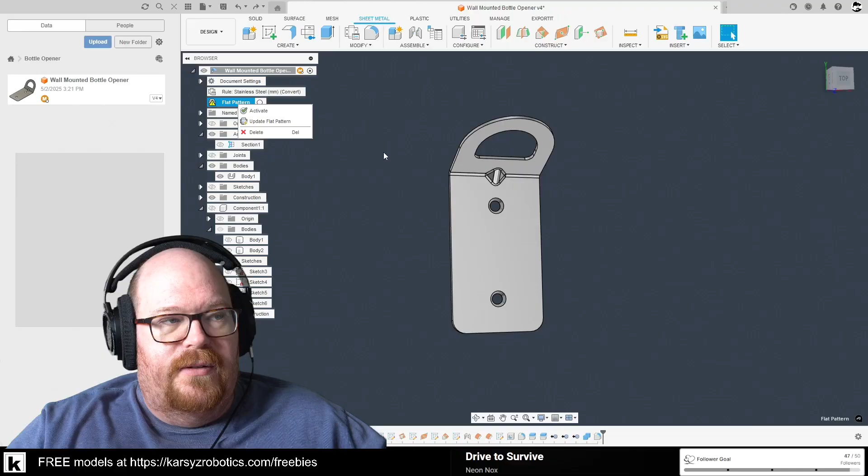Let's do a dimple. I'm gonna say unsuppress. It's gonna cause our flat pattern to be crazy, but we can activate it nevertheless, right? And show it like that. And it's gonna show us all the stuff with our bend and everything else, as long as we don't update it, because then if we update it, it's all gone.

So yeah, nice and rigid. You can even put a logo in the middle of this, something like that. Yeah, it could be like a keychain too. You could put a couple keychain things on the side here. So that might be something fun. I don't know if you want, since you're gonna get beer all over this, or soda, something like that. You are gonna spill, so whatever you put underneath here, you're not gonna want to have stuff attached to that.

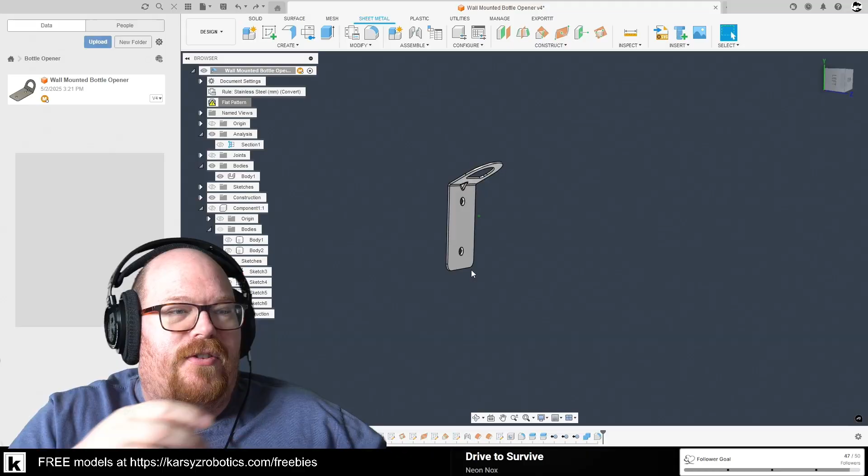But you can do a whole bunch of different things. This also works mounted in the other direction, because of the degree it's at. It should work, but you have to have the bend underneath here, or be able to go underneath—but why would you bother doing that? So this is kind of the desired idea. You could have a shelf under here to hold whatever you're putting on there, see one or two or something like that. But it's better to have things separated, maybe, for design idea.

So we'll call that the wall-mounted bottle opener. Yeah, it's fine, it's good, we know that. And then if we want to not have that, we can just back up the timeline a little bit. We can update the flat pattern now because there's no dimple in there. And this would probably be fine too.

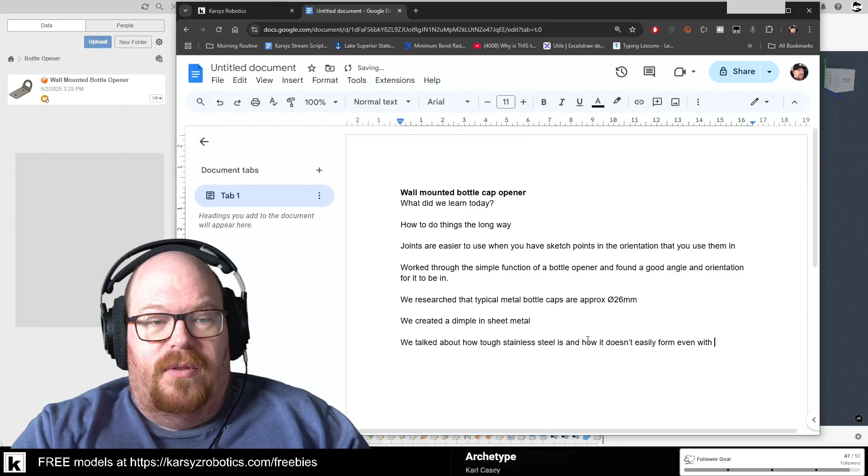We created a dimple in sheet metal. We talked about how tough stainless steel is and how it doesn't easily form, even with thin material. It's extremely hard - it breaks tooling because of the general strength.

There is no way to cycle through joint orientations when selecting points - besides moving the mouse around, there's no hotkey, no key combination or long press way to cycle through. What else did we learn?

You can put a lot of thought into something that seems really simple. I have the benefit of knowing how this works already - I've seen them, used them, probably close to 100 variations of what this looks like in different materials. I remember having an aluminum one on my keychain that was garbage, I don't even know why I kept it, it was so bad. A lot of them are just cast or injection molded aluminum.

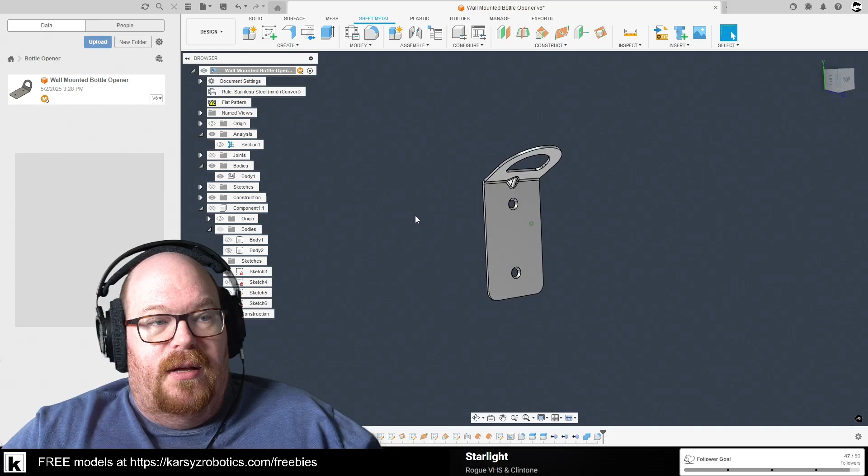So we did the dimples. We can make this look really neat by putting curvature into it - it would look a bit more pleasing. Although this serves its function completely fine, it would just look better with a little more aesthetics. I think we did things the long way - did we keep those sketches? Yeah, we did, didn't we? These ones, yeah.

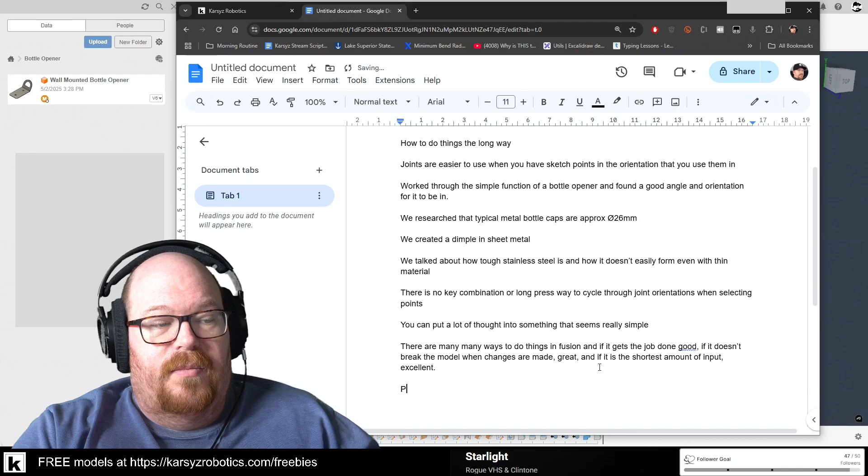There are many ways to do things in Fusion. If it gets the job done, good. If it doesn't break the model when changes are made, great. And if it takes the shortest amount of information input, excellent. And then always constrain - please constrain your sketches. Yeah, that's it.

Is there a fast way to put a date in here? Is there inserts in this? There's got to be, well - I don't think I've ever had to do this. Is there a way to insert today's date? Ah, oh wicked, love it.

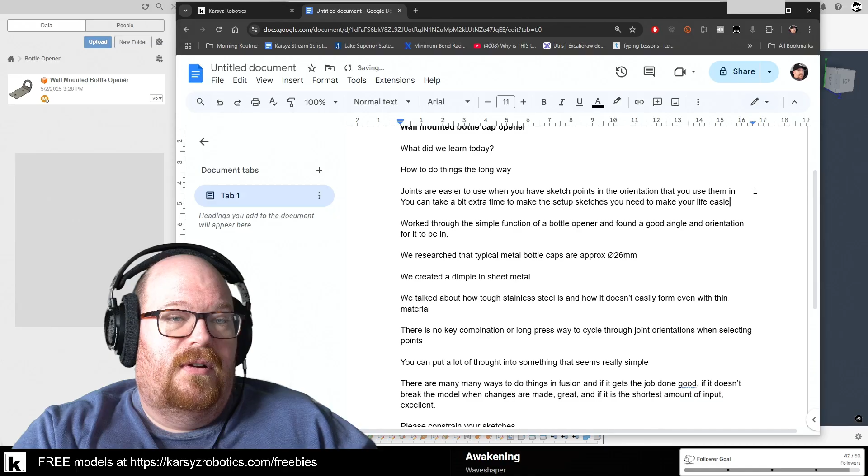So what did we learn today? How to do things the long way. Joints are easier to use when you have sketch points in the orientation that you use them in. You can take a bit of extra time to make the setup sketches you need to make your life easier down the road. Future you will thank you.

We worked through the simple function of a bottle opener and found good angle and orientation for it to be in when mounted to the wall.

We researched that a typical metal bottle cap is 26 millimeters in diameter. Even though we did it in inches, we created a dimple in the sheet metal.

Corner dimple, corner. Is that a corner dimple? Sheet metal corner dimple. I think that's what that's called. Oh god, no. Images - yeah, okay, I just want to make sure I was saying that correctly.

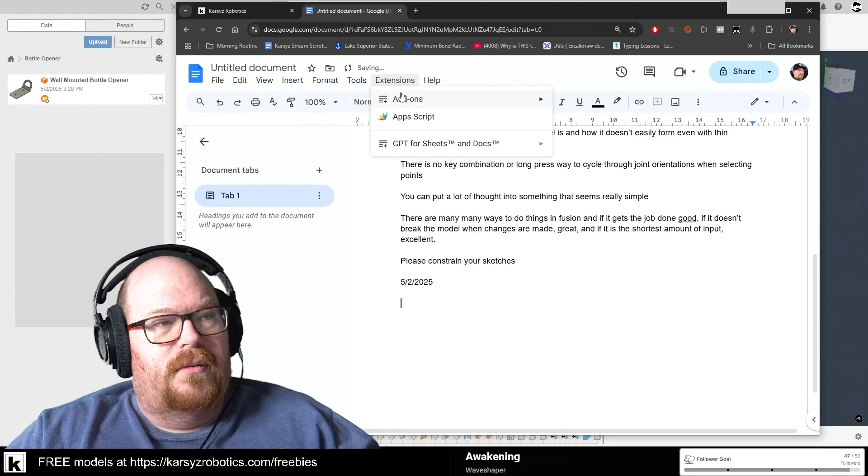I think it ran. Oh it did. That is so great. I could probably get word counts and all that stuff too. That's wild. I kind of like that a little bit better than this. This is a really cool thing though - it's got insert dates by typing out today, tomorrow, yesterday, May 2nd. Okay, cool.

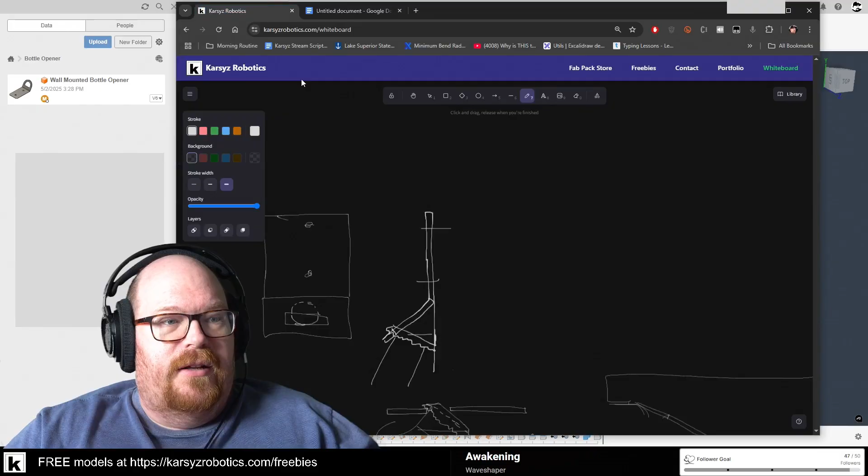So somebody definitely got paid a couple hundred thousand dollars to make that. Let's see, we got here, we have all the sketches. I'm not going to keep any of that, I don't think. This will be May 2nd, 2025 live stream notes. So we could say LS notes, stream notes.

And why don't we move this - can we make a new one right from here? Oh, here it is, stream notes. Move. Sweet, so we got stream notes. Bloop, bloop, there we go. Awesome. Maybe we can even do a picture of what this looks like. Save. Save again, yep.

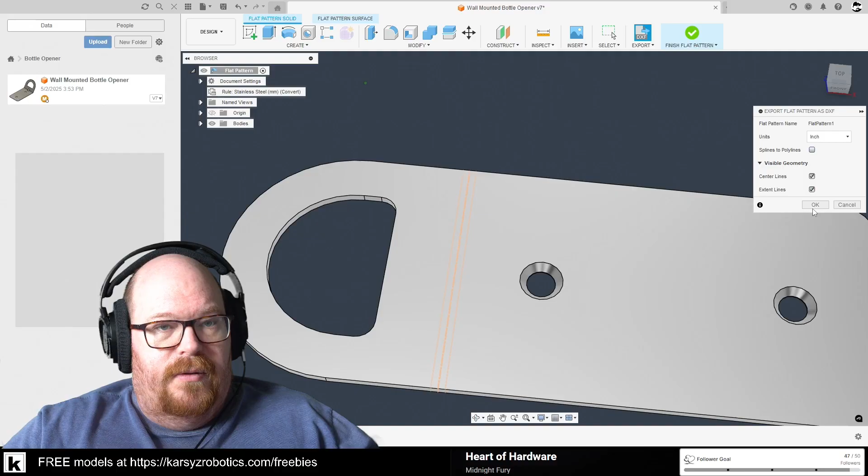Can't believe I did that. What am I thinking?

So this needs to be set up, put on a wall or something, put some screws in it. I don't really want to render this - maybe we'll just do a quick good enough in-canvas render. What a square.

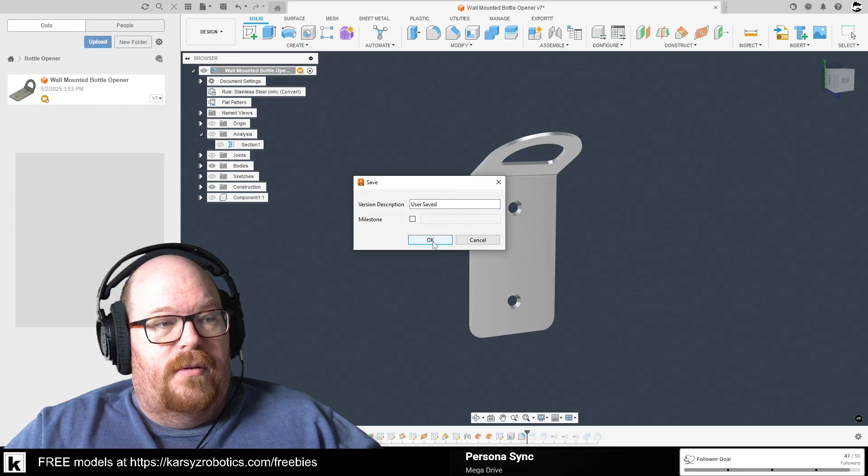All right, and then yeah, so good enough for now. Thanks very much for watching.